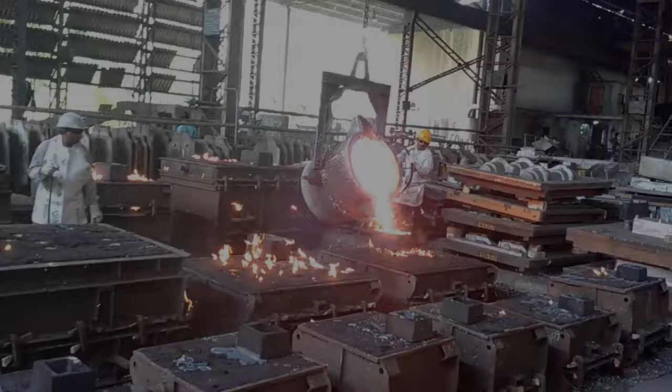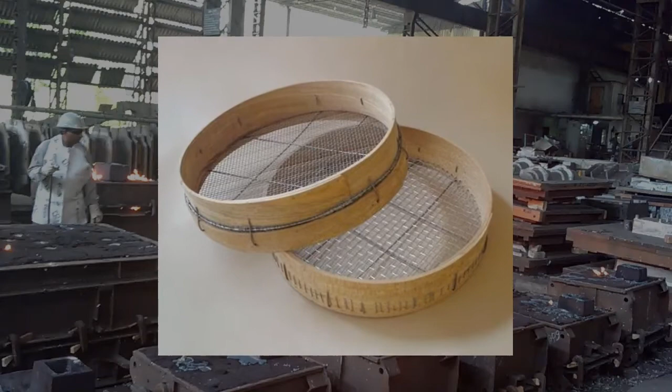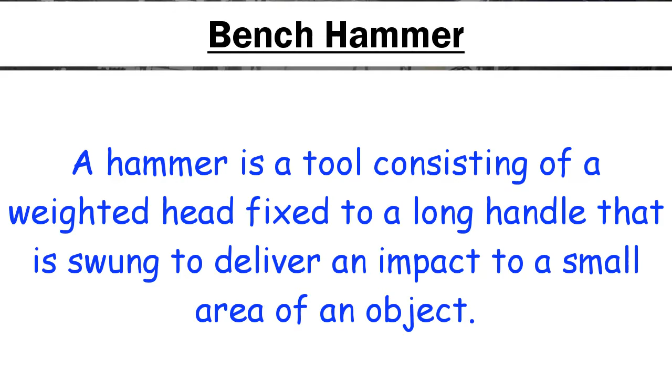Next topic is bench hammer. A hammer is a tool consisting of a weighted head fixed to a long handle that is swung to deliver an impact to a small area of an object.

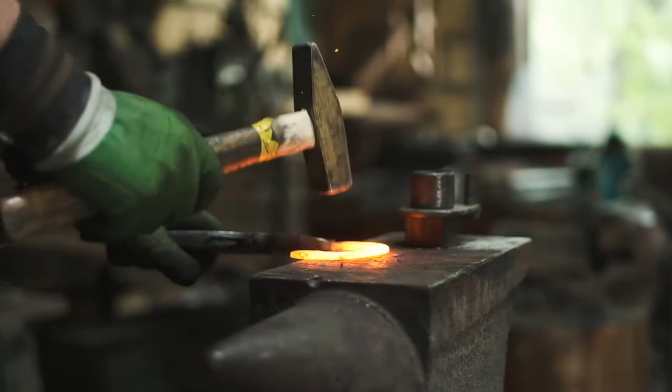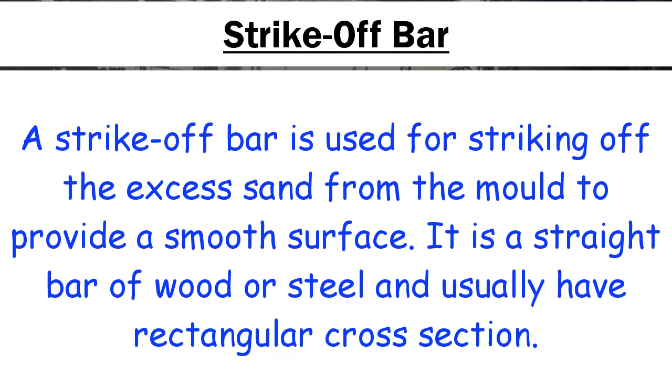Next topic is strike off bar. A strike off bar is used for striking off the excess sand from the mold to provide a smooth surface. It is a straight bar of wood or steel and usually has a rectangular cross section.

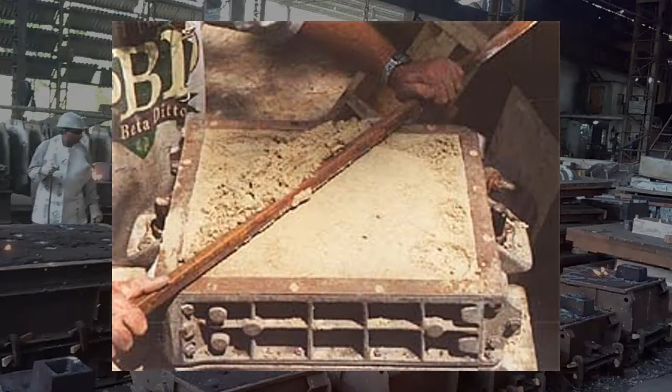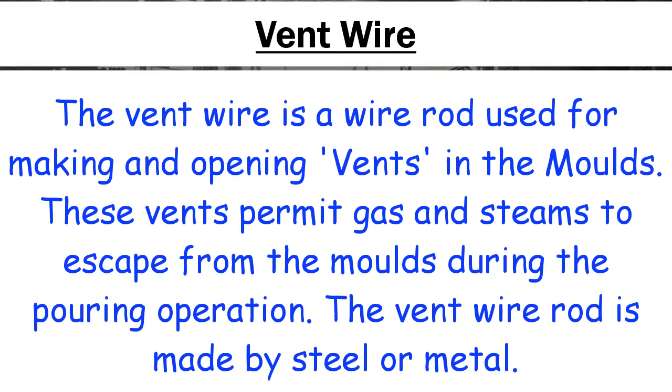Next topic is vent wire. The vent wire is a wire rod used for making and opening vents in the molds. These vents permit gas and steam to escape from the molds during the pouring operation. The vent wire rod is made of steel or metal.

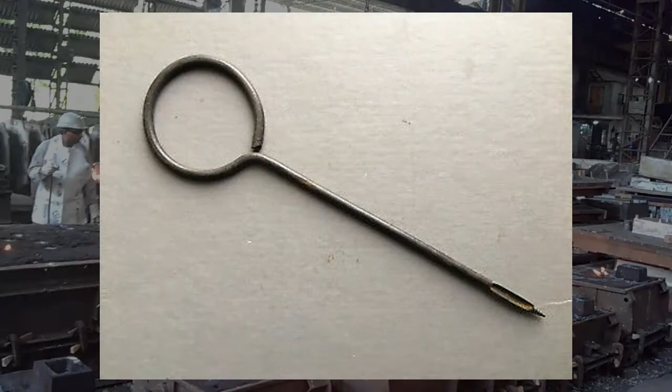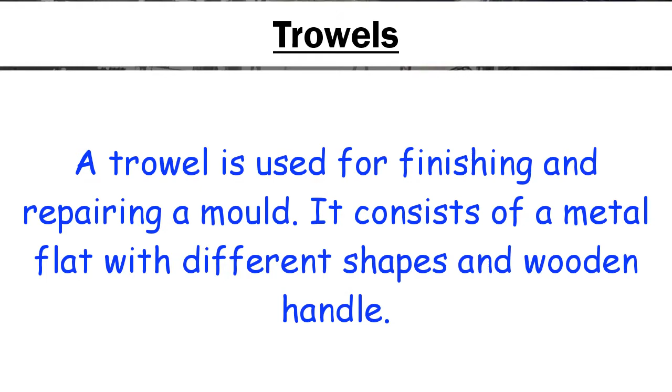Next topic is trowels. A trowel is used for finishing and repairing a mold. It consists of a flat metal piece with different shapes and a wooden handle.

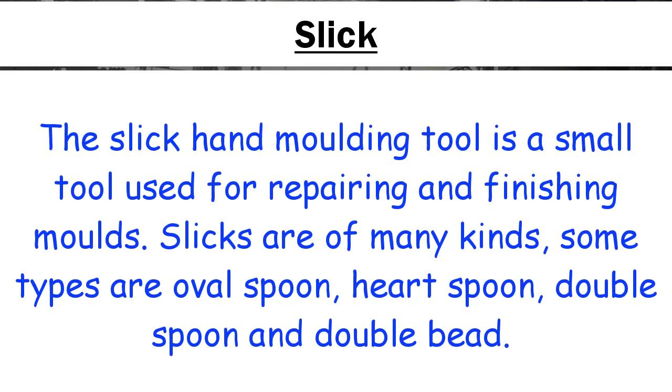Next topic is slick. The slick hand molding tool is a small tool used for repairing and finishing molds. Slicks are of many kinds. Some types are oval spoon, heart spoon, double spoon and double bead.

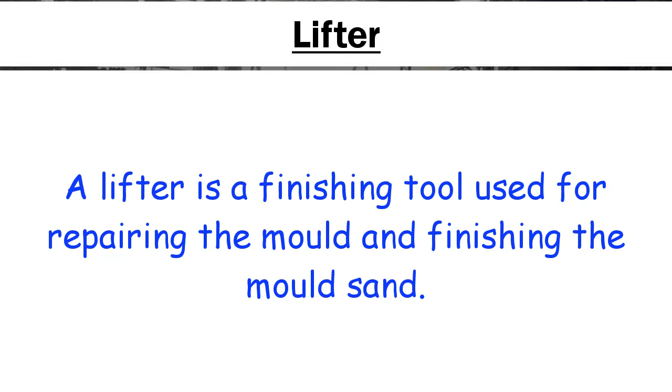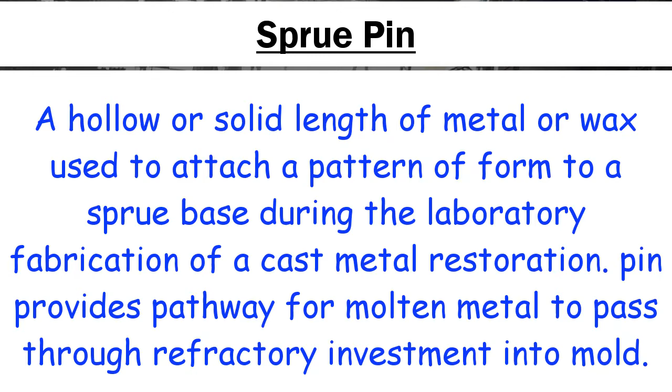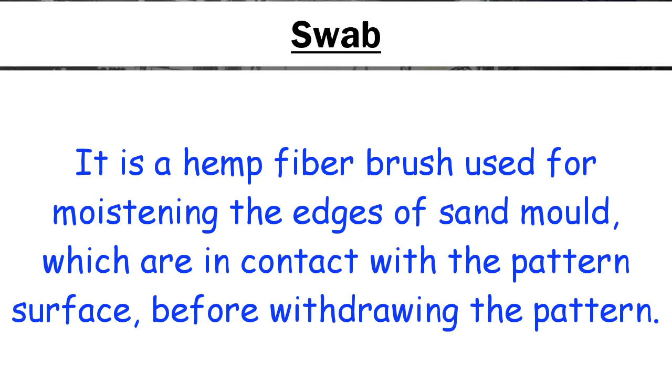Next topic is swab. It is a hemp fiber brush used for moistening the edges of the sand mold which are in contact with the pattern surface before withdrawing the pattern.

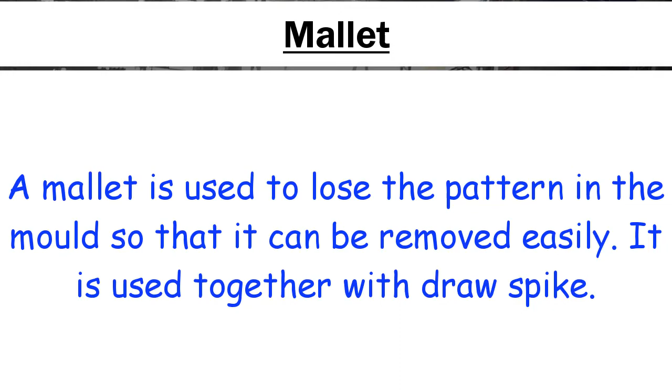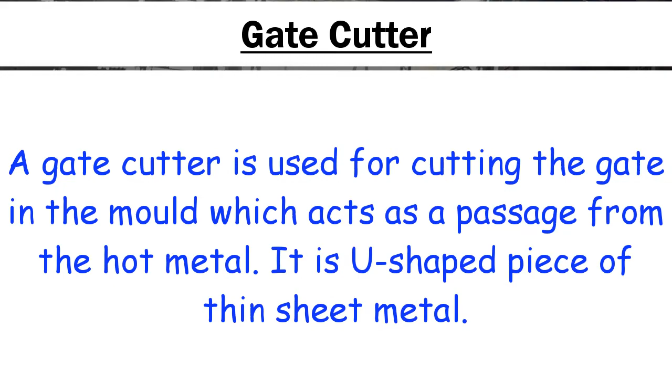Next topic is gate cutter. A gate cutter is used for cutting the gate in the mold which acts as a passage for the hot metal. It is a U-shaped piece of thin sheet metal.

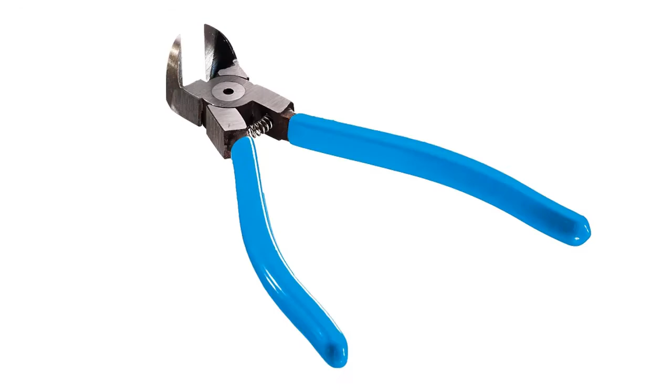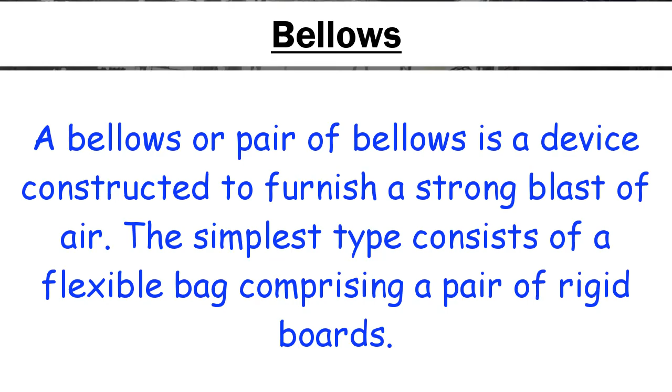Next topic is bellows. A bellows or pair of bellows is a device constructed to furnish a strong blast of air. The simplest type consists of a flexible bag comprising a pair of rigid boards.